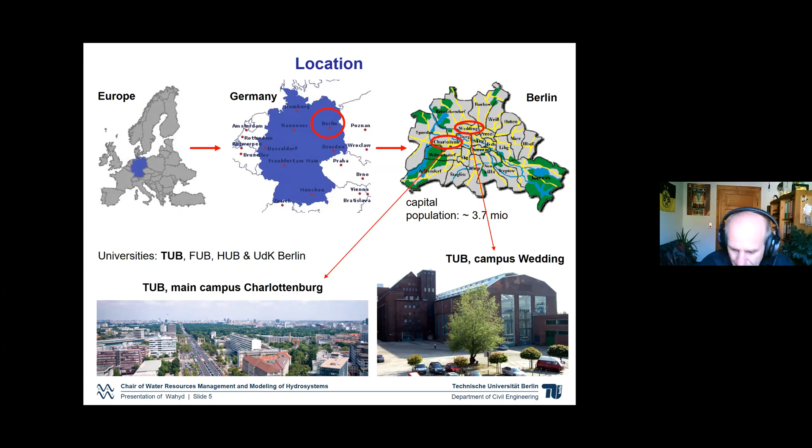Some facts on TU Berlin: we have 35,000 students on average, and 350 professors, so the ratio is 1 to 100. If you look in the US and in the UK, probably the number is much better there. Nevertheless, it also works in Germany.

So we have 7 faculties organizationally. My chair belongs to faculty 6, Planning, Building, Environment. Within the faculties we have institutes; in our faculty we have 8, including architecture, geosciences, landscape engineering, and others, and also civil engineering. Within the institutes we have the chairs, so in that sense the chairs are the smallest units. My chair is one of the 13 chairs of this institute. There is another chair in the water field, Professor Barjenbruch's, who does urban water management, and we closely collaborate.

I may also add, this is not on the slides: Berlin has been successful within the excellence strategy of the federal government, and since 1.5 years there is a joint activity of Berlin, the Berlin University Alliance, where 4 universities are collaborating in various fields. We are also glad that we can participate in one of the bigger research activities starting at the beginning of next year, called CLIVA, Climate Impacts on Berlin and the local and regional surroundings of Berlin.

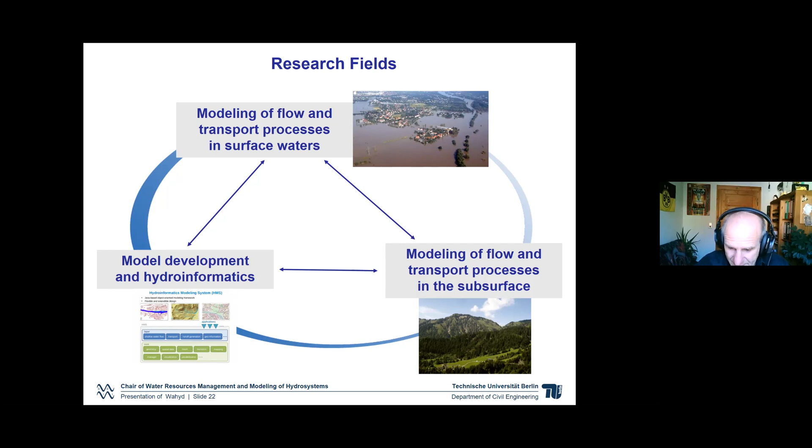Among the research activities, this research training group has already been mentioned. Allow me a few comments on making a PhD in Germany, because it differs a bit from how it runs in the US and many other countries.

In Germany, making a PhD within a structured program is not that common. I would say much less than 50% of students do a PhD in such a program. They make a PhD within a project, or they are funded by the university through basic funding, as was the case for Ilhan, or they have a scholarship, as is the case for Jia Heng, who is connected from Loughborough.

We do have PhD programs, but they provide a framework, possibly some financial support, but don't have a clear content focus. When they exist, they have a broader focus, say a PhD program in the water field, for example. Specifically looking at Berlin, there have been a few, but they have not been that successful, to tell the truth.

Making a PhD in Germany generally takes a relatively long time. 4 to 5 years is quite common, and I think it's faster in many other countries in the world. On the other hand, these kinds of research training groups do exist in Germany.

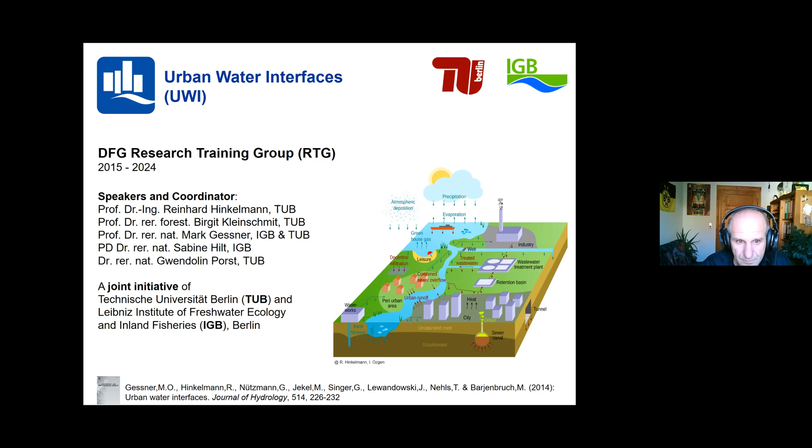Okay, let's say some information on urban water interfaces. Why are they important? Because they play a key role in the urban water cycle. They connect a large number of compartments and subsystems, and have a considerable impact on overall system behavior.

We have a very broad view on interfaces. There are interfaces in natural systems - I will comment on groundwater and surface water. There are interfaces in technical systems like a sewer system between wastewater and air, or interfaces between natural and technical systems like bank filtration, which is quite common in Berlin.

In addition, we have identified 4 areas where we do very intensive collaboration. We call these common topic fields. Regarding qualification, we want to link engineers and natural scientists. I forgot to mention that the research training group is a close collaboration of the Technische Universität Berlin together with the IGB.

IGB is the Leibniz Institute for Freshwater Ecology and Inland Fisheries. This is a leading institution for freshwater ecology, for lakes and so on in Germany, and it's also internationally renowned. We want to bring them to a new quality of interdisciplinary knowledge with a strong international component, within a structured framework.

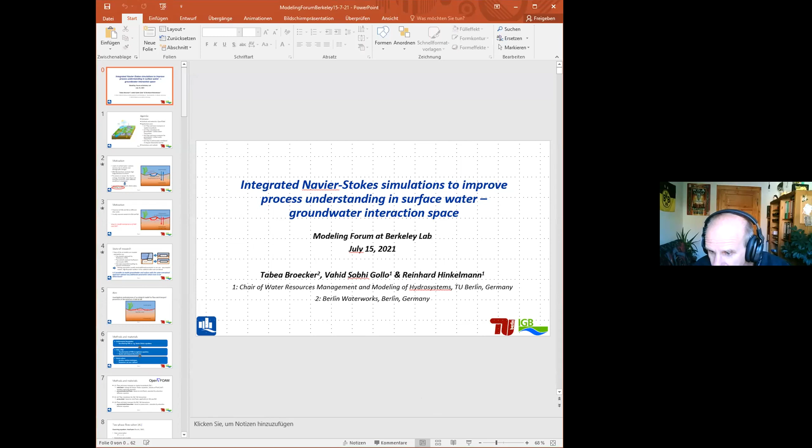So today I would like to talk with you about an integrated Navier-Stokes solver. With the help of the solver, we can improve the process understanding in the interaction space of surface water and groundwater. The major part of this presentation, all the work, comes from this research training group.

The major part of the presentation is part of the PhD of Tabea Broecker. She finished last year, and there are also contributions from Vahid Gollo. He is coming into the final stage of his PhD, and I have the pleasure to present the results of these PhD students.

And we have reused it many times. Ilhan, the effort was, of course, quite good to be done. It's really a nice figure.

Within the presentation, I will give you a short motivation. Then I will introduce the methods we used and extended within the open source simulator OpenFOAM. And then there will be four application cases.

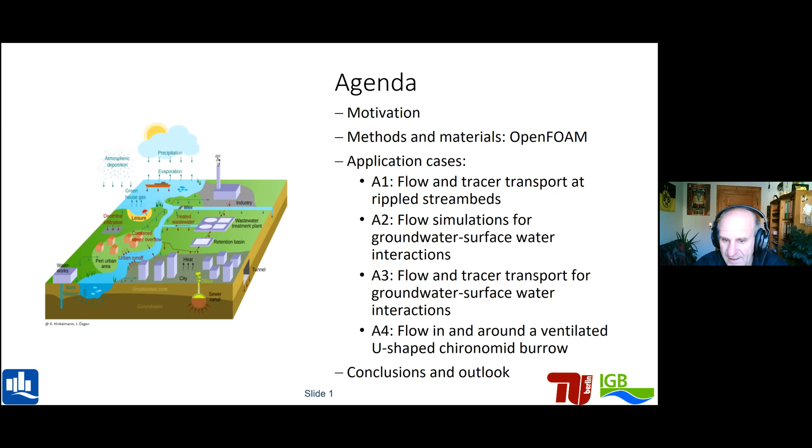Three are related to flow and transport processes at the interface of groundwater and surface water. There is a fourth case where we consider another interface, between free water and porous medium flow - this is a burrow which has been dug by something like an earthworm. At the end, some conclusions and an outlook on further work.

Okay, maybe first the hyporheic zone. Probably you are all aware that the loads on water systems are increasing, more specifically even on urban water systems they are increasing, and we have to expect climate change and other changes that will increase the stress on these systems.

The hyporheic zone connects the surface water with the groundwater, and a lot of biogeochemical reactions take place there. So on the one hand, we try to protect this zone. On the other hand, we may want to engineer this zone to make advantage of it, because it has some possibilities to remove or retain contaminants.

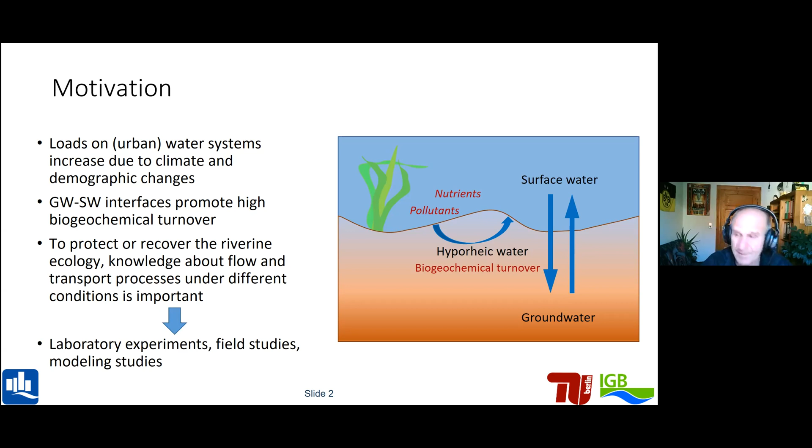If we want to go into the details, it's good to know how the processes occur there, how the flow and transport processes work in these areas. We improved our process knowledge over the last couple of years. We can do that with lab experiments - other colleagues in this research training group did lab and field experiments. Our focus was on modeling.

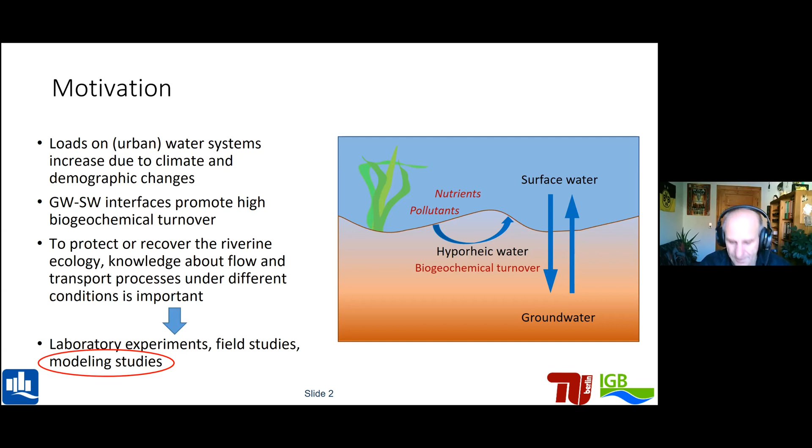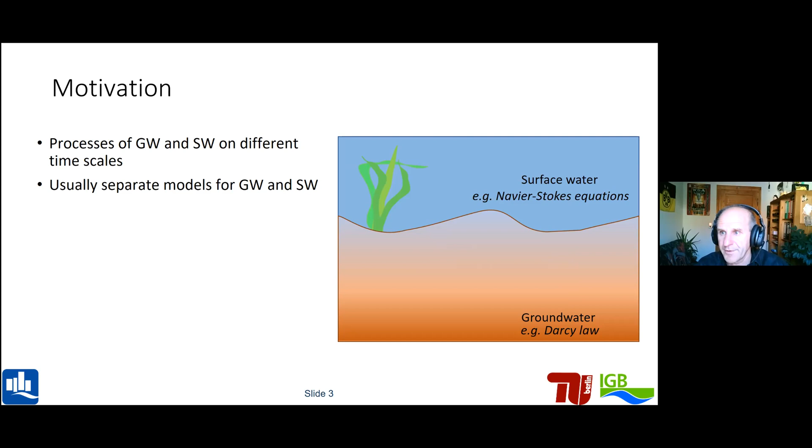Of course, the time scales are quite different between surface water and groundwater. In surface water, the flow velocity is a meter per second, while in groundwater it's a meter per day - quite different time scales. We have to bring them together. The common approach, probably also applied a lot in your group, is that we have a separate model for surface water flow and for groundwater flow, and you do some coupling.

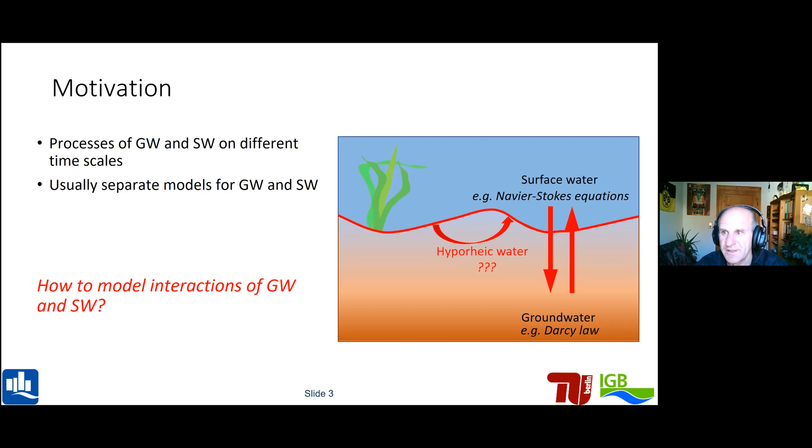For some questions, a simple coupling might be sufficient, no question. But there are also questions where the interaction between the two systems plays a very important role, and there more advanced methods need to be taken into account, which can also account for feedback effects, for example.

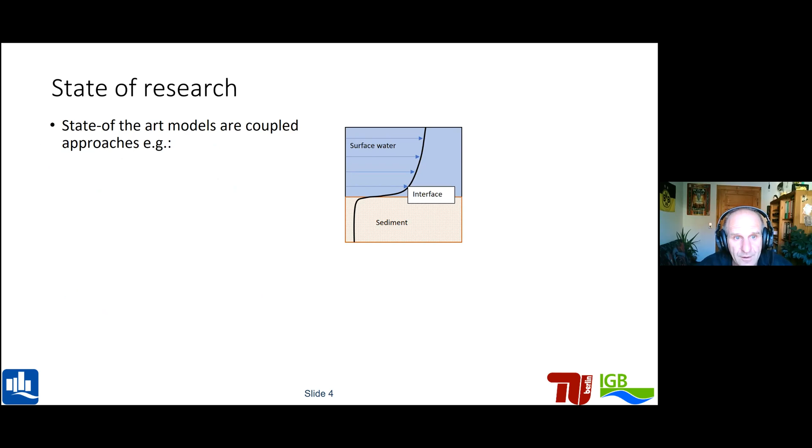If we consider the state of the art, different coupled approaches exist. There is a one-domain approach, already a couple of decades old, and there is a classical two-domain approach by Beavers and Joseph, where they introduce a specific parameter to account for the jump in shear stress at the interface. This coefficient is generally determined by calibration.

What is often done in many cases is a one-way coupling, again without taking into account the pressure properly and without taking into account feedback effects.

Also, when the river sediment or porous medium is a bit coarser, the Reynolds numbers of the flow within the transitional zone may become much higher than Reynolds number 1, and then we are out of the range of the Darcy law.

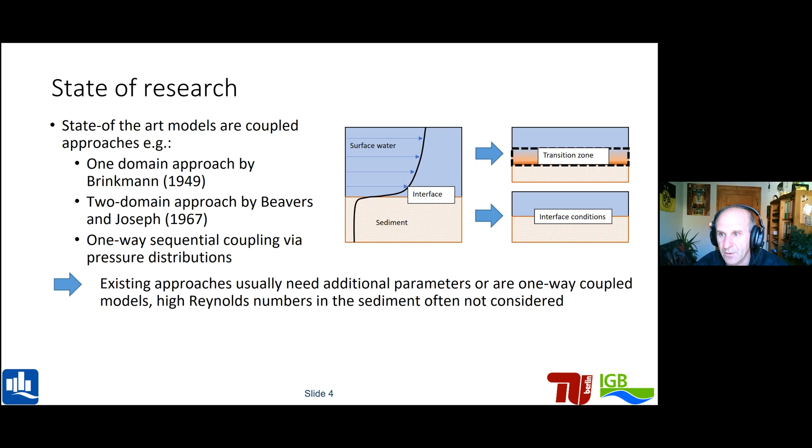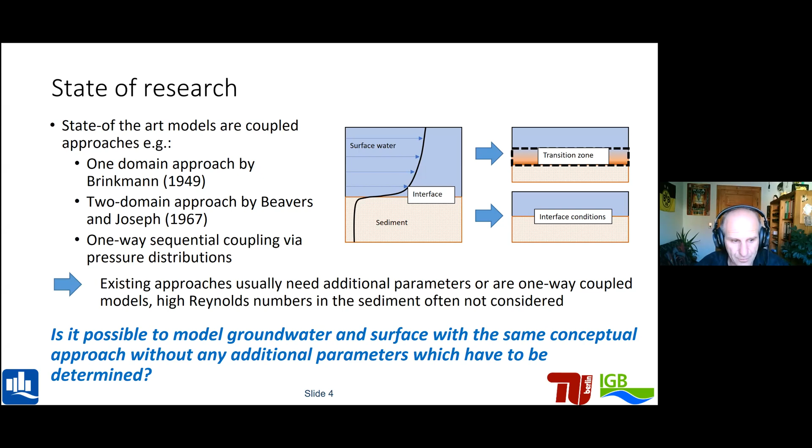So the question is: are there other ways to take into account the processes occurring around this interface, including the feedback effects? Are there other approaches to do that? Fortunately, yes. Other researchers already did some work on this, and we could use and extend that work.

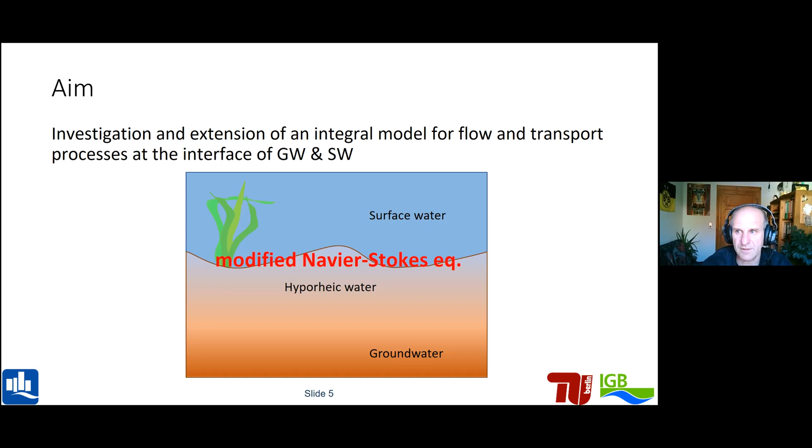If we formulate a modified version of the Navier-Stokes equations, we can apply the same model concept for the porous medium and for the free flow. We introduce a porosity, which is 1 in the free water and about 20-30% in the porous medium. Also, a specific resistance term will be introduced, which I'll show you soon.

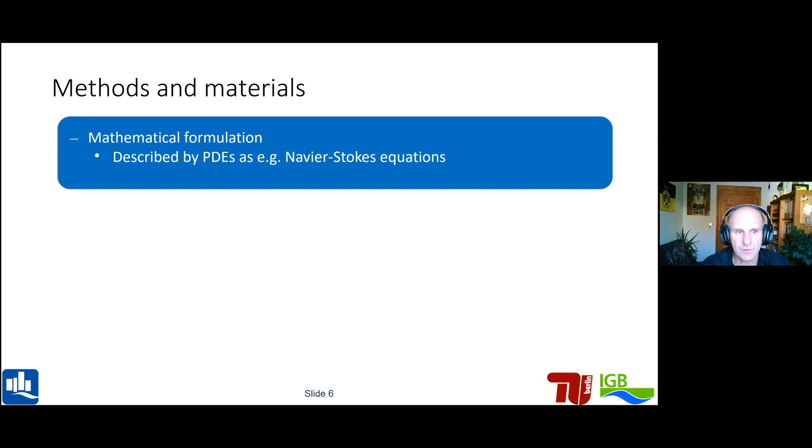Most of you are probably aware that we formulate balance equations: mass balance and momentum balance equations, in this case the Navier-Stokes equations. This gives us a system of coupled, nonlinear partial differential equations (PDEs).

We do some discretization. OpenFOAM uses the finite volume method in space and finite difference techniques in time. We then end up with algebraic systems of equations, which require iterative solvers. We use these solvers both to solve the systems of equations and, importantly for Navier-Stokes, to couple the pressure equation with the momentum equations.

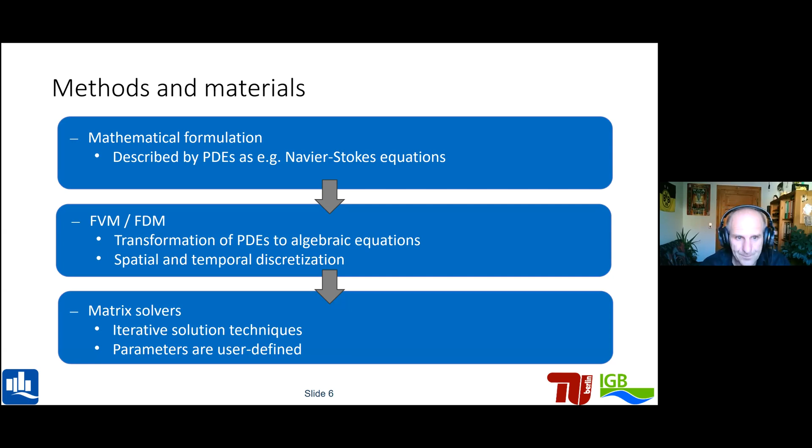As mentioned earlier, we used and extended open solvers provided by OpenFOAM. We started first by modeling only the flow in the river, excluding the sediment, treating the sediment as a rigid boundary. For this, a solver called Interfoam was available.

Interfoam uses a volume of fluid method. We used it also for two phases - I'll come back to the two phases soon - and to capture the interface between the surface water and the air, an interface capturing approach is used.

In the second and fourth applications we applied that solver, and in the third case we extended it further by adding a transport equation.

Now some ideas on the balance equations for the two-phase flow solver. Why do we need two phases? We need two phases when simulating flow, for example, over ripples and dunes in a riverbed, where the water level is only a few decimeters high. To track the free surface, one good possibility is to use two phases, including the air phase, in order to get a good representation of the free surface.

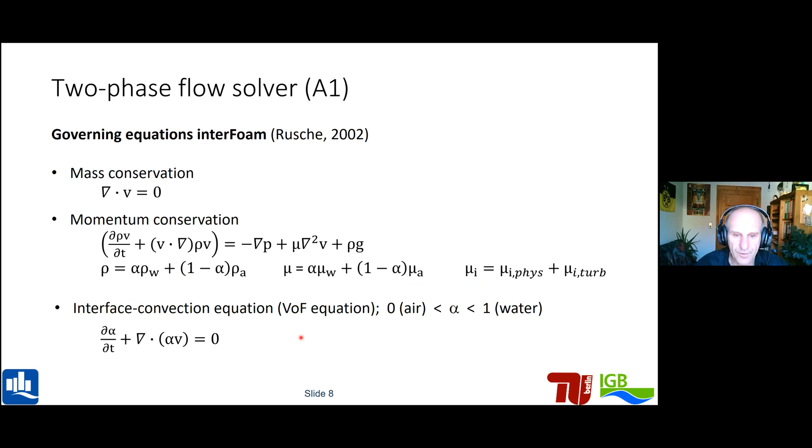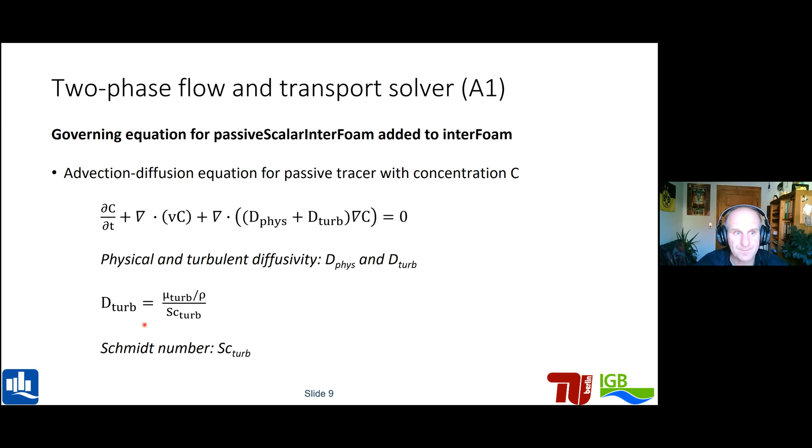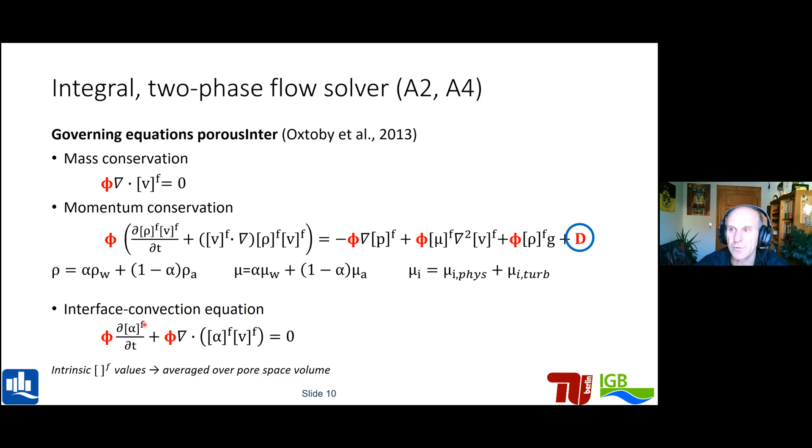The other things remain more or less similar. And there is a further term added to the momentum equation. This is, let's say, a resistance term, which accounts for different effects we will see soon.

So here is the resistance term in detail, and maybe to comment on how the porous medium is taken into account in this extended version of the Navier-Stokes equation. It's taken into account by a porosity and by a characteristic diameter. So there is no permeability or hydraulic conductivity. This is not taken into account.

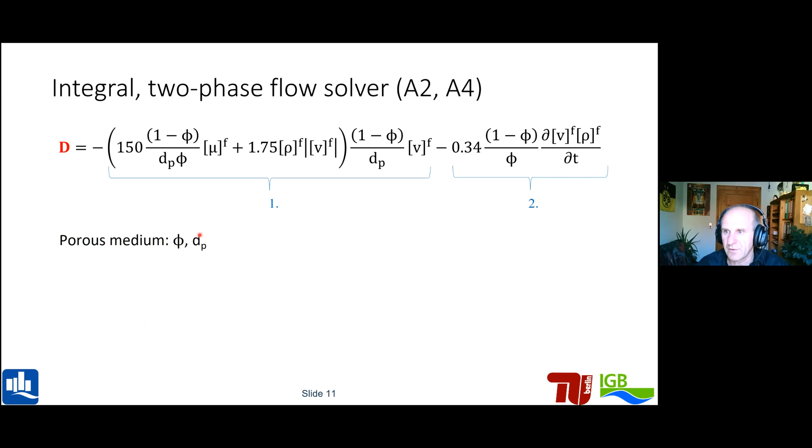These two parameters describe the porous medium. Of course, when we know these parameters, we also have an idea of how big the hydraulic conductivity or permeability can be. And these terms, the first term accounts for the friction of the fluid with the porous medium.

Let's say an approach from Ergun has been implemented. And the second term accounts for an increase in the effective mass, and it also accounts for recirculation zones, and another experimental approach or results from Van Gent are implemented there.

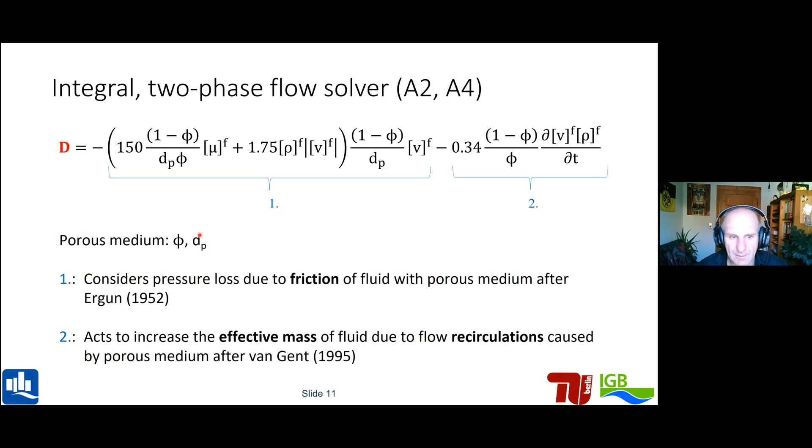So this resistance term behaves quite good for coarse material when the dP is in the range of centimeter or millimeter. If it goes much below a millimeter, then the CPU time is tremendously increasing, and then it's no more recommended.

Okay, we also added a transport equation on that. Nothing specific compared to the previous part.

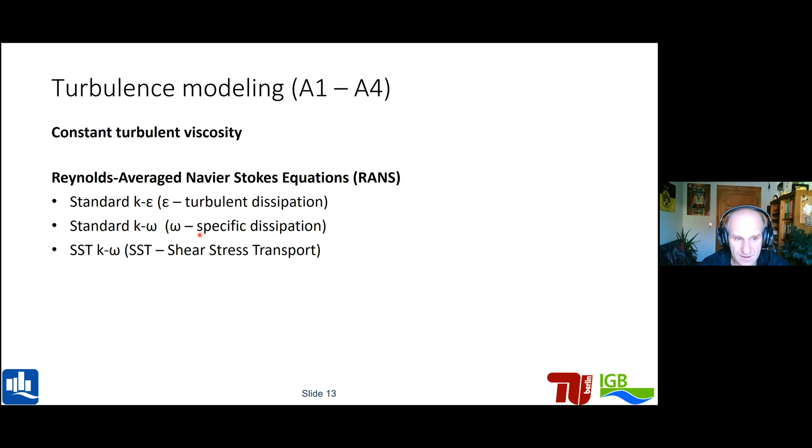With regard to the turbulence, fortunately in OpenFOAM many models are available, like the standard K epsilon, the K omega, and the combination of both is K omega SST. Sometimes we made good experience with that.

And for some cases, we even used the LES method, and the LES method, of course, resolves much more of the eddy structures. Let's say the coarse eddies are directly resolved by the grids, and we only need a model for the very fine eddies, which are below the grid size.

On the other hand, for the systems we investigated, the CPU time increases by at least a factor of 10 when we switch from K omega SST to large eddies. So therefore, we carefully have to check whether this is really needed.

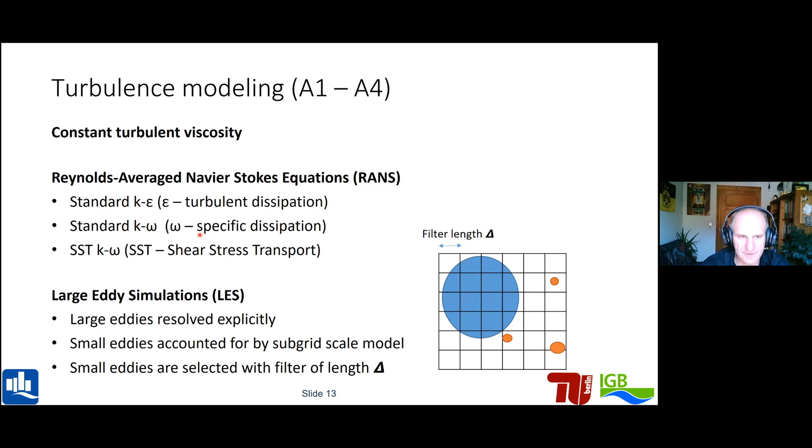We have to generate a mesh. There are some possibilities within OpenFOAM, but we can also add external mesh generators, and then we have to set the boundary conditions. I may mention, the system we will see soon has an inlet and an outlet, and then an upper wall and a lower wall.

Different kinds of boundary conditions are set for the velocity, the pressure, the concentration. In principle, they are of Dirichlet or Neumann type.

I would like to add, if we compare these CFD simulations with shallow water simulations, it's a bit more tricky to come to stable results. For the CFD model, you need to have a good combination of robust boundary conditions, a fine mesh, and the suitable turbulence model. It takes some more time compared to shallow water flow modeling.

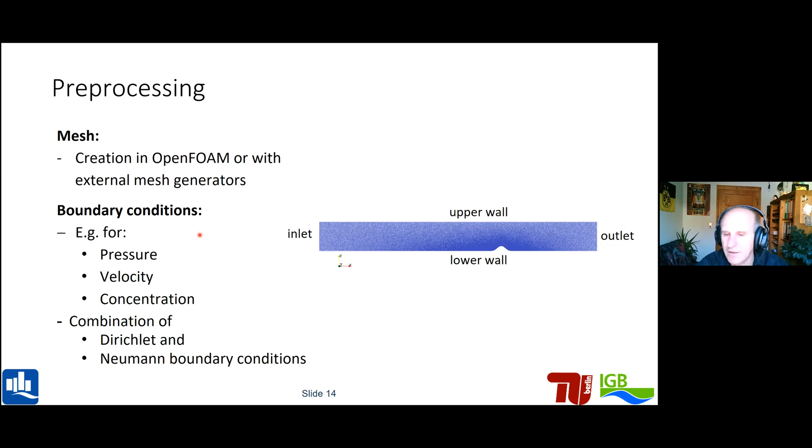Okay, that brings me to the first application, flow and tracer transport at a rippled streambed. Before we went to natural-like systems, we wanted to test our solver.

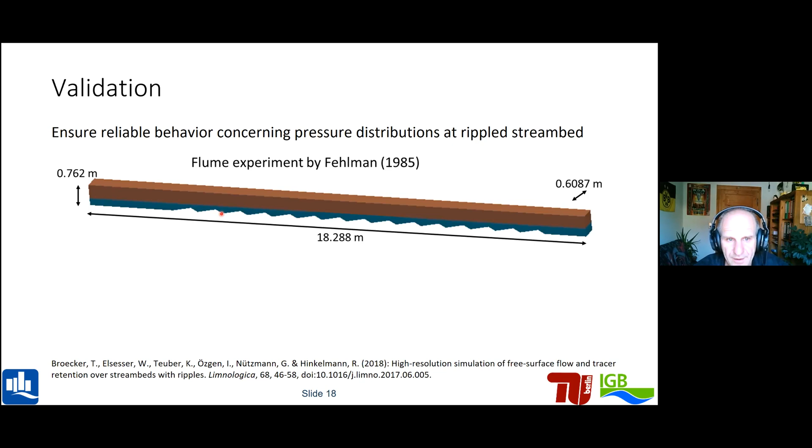We did that with several cases. I'm showing you here one case. There were experiments carried out by a person, Fehlman, who investigated a system where ripples or dunes have been idealized by triangles, and their data were available so we could compare our numerical results with these experimental results.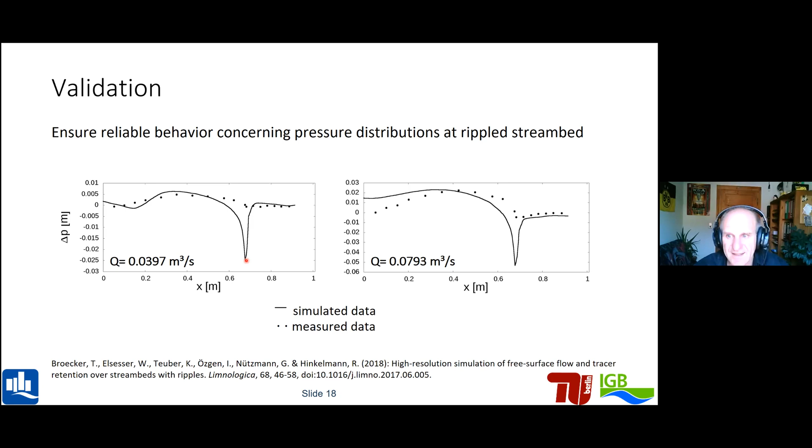Okay, and then to add the transport equation, we did standard cases. There are 1- and 2-dimensional analytical solutions for constant and pulse injections, and we checked our model with that. The agreements were quite good, so we thought we could now apply the solver to other cases.

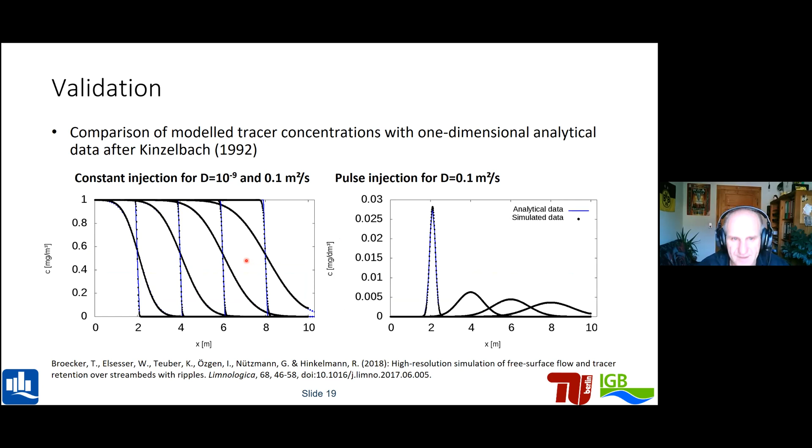So the case that Tabea investigated very systematically is shown here. We have a system 1 meter high, with 50% water and 50% air, and an inflow area so that the flow is developing and is fully developed by the time it reaches the ripples, then some outflow area to have good conditions on the outflow boundary.

Then she made many investigations varying the ripple height, in the range of 1, 5, 10 centimeters, the ripple length 20, 40 centimeters in that range, some distances between the ripples, and we did that for different discharges and different turbulent Schmidt numbers.

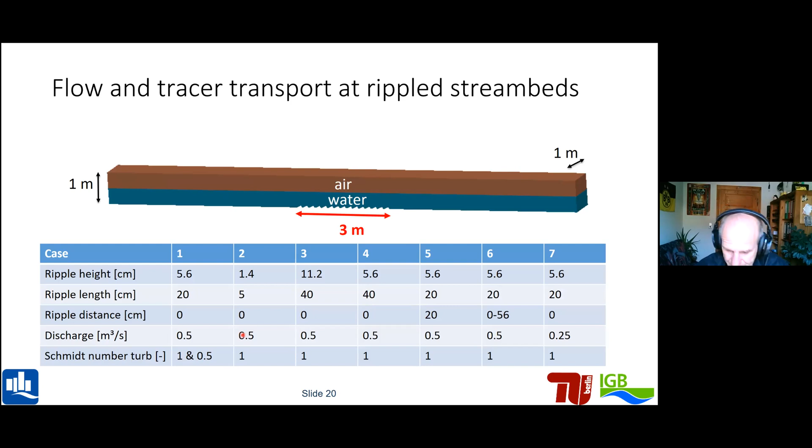To show you some results of the reference case, first here a view on the mesh. The height was here 5.6 centimeters, and you see that the mesh is quite fine. The edge sizes were in the range of a few millimeters.

So we have a quite fine mesh in the water, up to the free water surface, and then of course more coarse in the air. We see flow from left to right, high flow velocity above the ripples, and smaller flow between the ripples. Why the flow is smaller between the ripples we can see here, with flow over the ripples and eddies occurring.

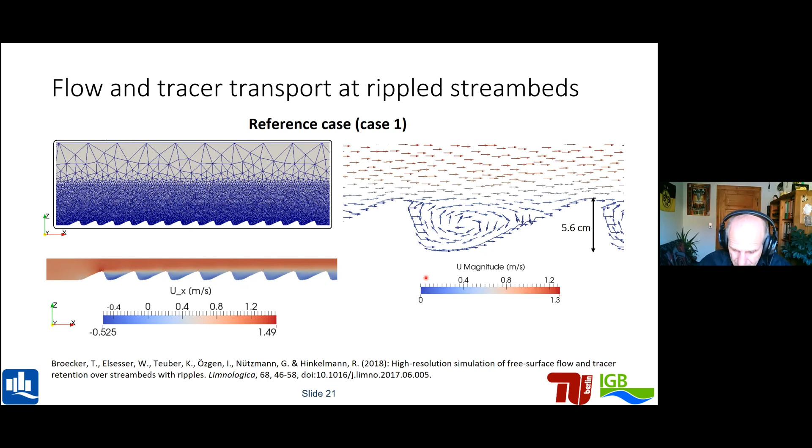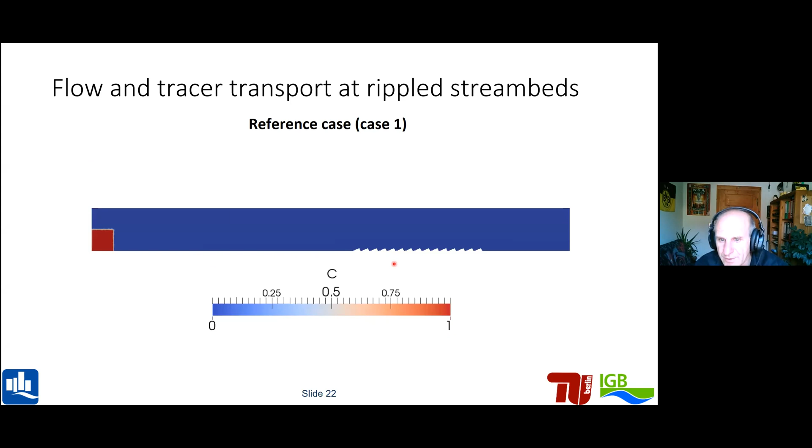Here is a case where a tracer has been injected, transported from left to right over the ripples. Then the scale switches from 1 to 0.05, and we see that some tracer is retained. We saw the eddies, so some tracer is retained between the ripples, and it takes a bit longer until this tracer is also removed.

From the many cases, I have two where I want to show some other results. For example, if we double the ripple length, the system looks completely different. While we had the eddy before, now with doubling the ripple length, no eddy occurs. We have a very smooth flow here, and the tracer is removed much, much faster.

We also see a bit higher pressure on the upstream side where the water comes, and a bit lower pressure around the crest. This lower pressure, which we also saw in the Fehlmann experiment with this drop in pressure, we see it qualitatively here as well.

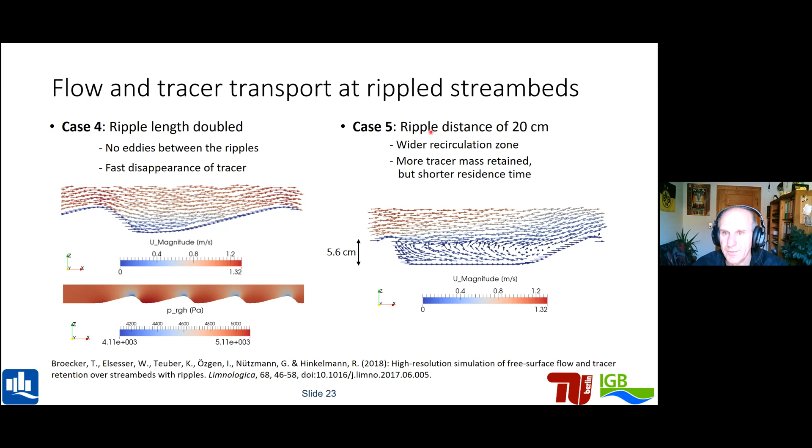In another case, we introduced a distance of 20 centimeters between the ripples, and we again see an eddy structure, but now much larger. We see a wider recirculation zone with much more tracer retained, but the overall residence time has been shorter.

The reviewers asked us to do some more investigations, and we did. They wanted to know, for example, how the pressure differences at the middle ripple for the different cases.

So the pressure difference, I've shown you an area where we have a high pressure area and a low pressure area. And from that, we can determine a pressure difference along the ripple. This pressure difference is quite different in the different cases. For example, in case 3, it's relatively high.

We also considered the breakthrough curves, and for example, this high pressure difference was also related to a high peak in the breakthrough curve.

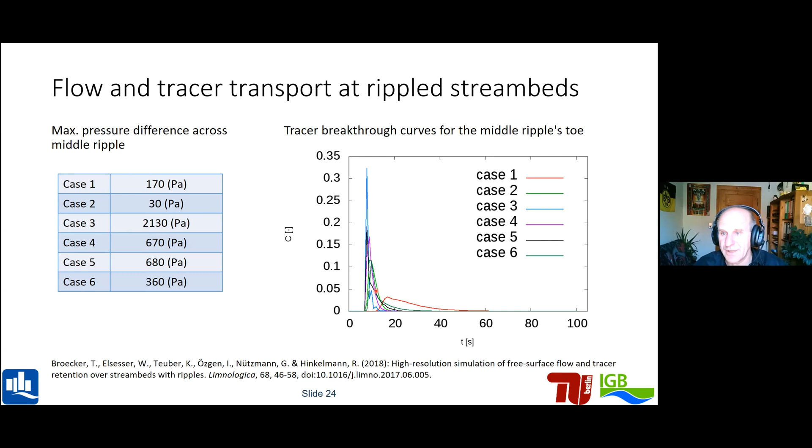We could draw some conclusions from that. The solver was capable to simulate the complex flow fields between the ripples and the tracer transport between the ripples. And we found out that the discharges, the ripple size and the spacing significantly impact the flow and the retention behavior between the ripples.

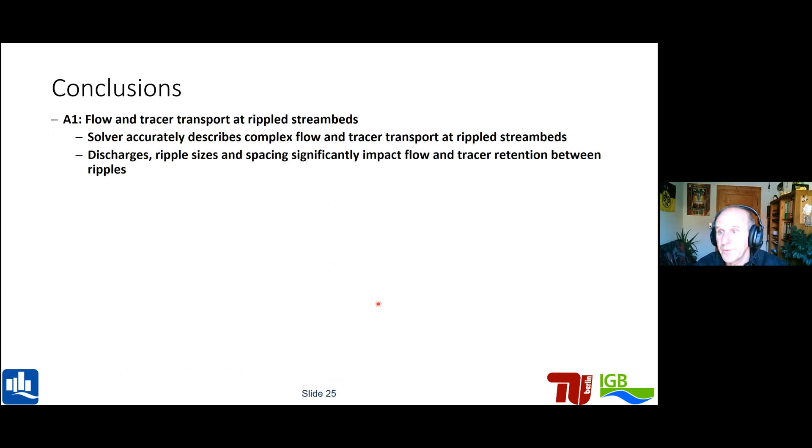So in the next application case, I would like to give you some idea of the solvers for this case. They are similar in the other cases. We have to choose solvers for the interface convection equation, for the pressure equation, and for the momentum equations. Maybe to comment on the pressure equation, this is a Laplace type equation, so we have symmetric systems of equations.

We can use a PCG, preconditioned conjugate gradient method. We can use some algebraic multigrid preconditioning, and for the smoother in this multigrid cycle, we can use a Gauss-Seidel method.

For the momentum equation, the matrices are non-symmetric, so we need a solver for non-symmetric matrices. One of them is BiCG, bi-conjugate gradient method, and the preconditioning is carried out with some incomplete lower upper LU decomposition.

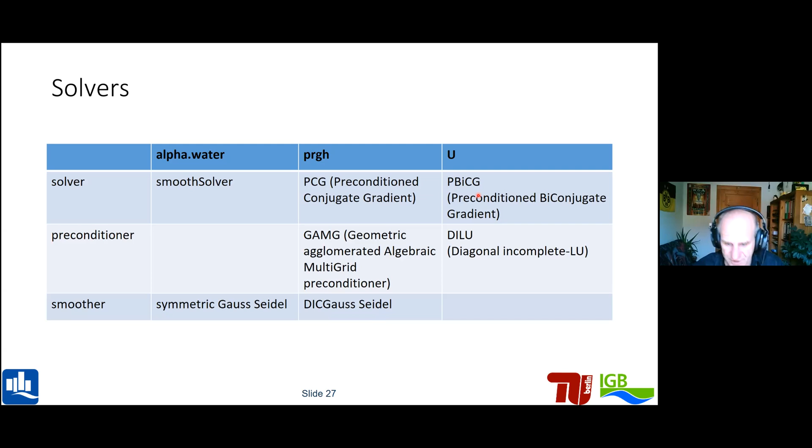Again, before we went to the ripple system, we checked the literature for some test cases. On the left we have the flow through, let's say, a rectangular domain or a rectangular dam. Imagine we have water standing here on the left, and then we have a porous medium, and then we have a seepage through the dam or through the domain.

The integral solver computed the green points, and the green points coincided quite well with other numerical and experimental results.

And we had another case where the seepage line through a more natural or more dam-like structure is investigated. There is an analytical solution available after Casagrande, and again, the solver could reproduce this analytical solution quite well.

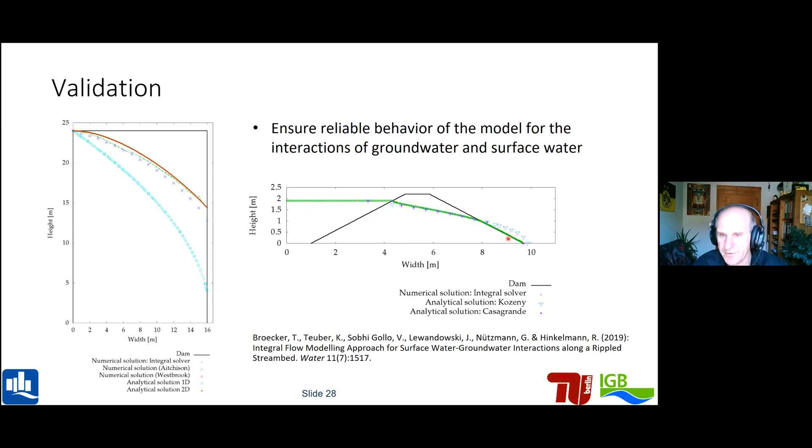So then we went back to the system of the first case, and we added the sediment. We had two cases, one where the sediment consists of sand with a diameter of 2 millimeters, the other case was with gravel, 15 millimeters, and the porosity was 25% in both cases. Then the same cases as before have been investigated.

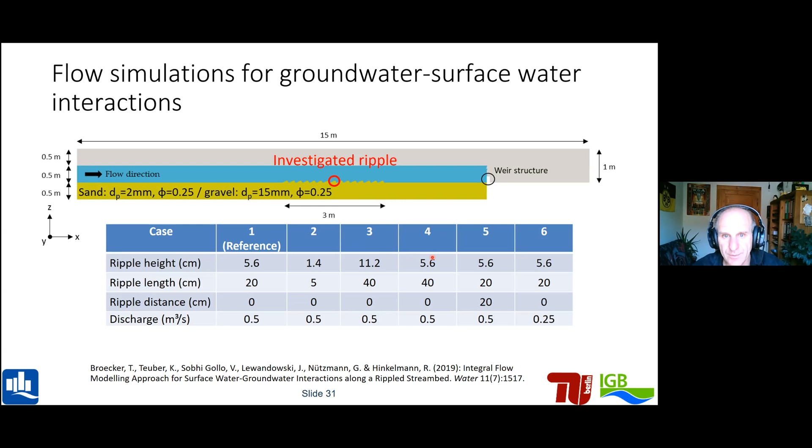So we consider in the following the middle ripple. What was important, we were interested in what is the exchange between groundwater and surface water. For that, we considered this ripple much in detail.

On the upstream side, there can occur areas with inflow and outflow. On the downstream side, there can be areas with inflow and outflow. So Tabea computed all these fluxes to, at the end, have some ideas whether we have inflow or outflow, and to consider that in detail.

And of course, these fluxes are quite important for other processes like biogeochemical things that do occur there in the hyporheic zone.

So, some results, let's start here to consider some results on the left. We see here the ripple, and what we see here is, again, a very complex structure. This is again the reference case. Maybe you have in mind from the previous simulation, we had one ripple area, one eddy, and now we have something like two eddies.

We have one eddy here, another eddy here. And we see inflow from here associated with a bit higher pressure, and then we have, let's say, outflow here.

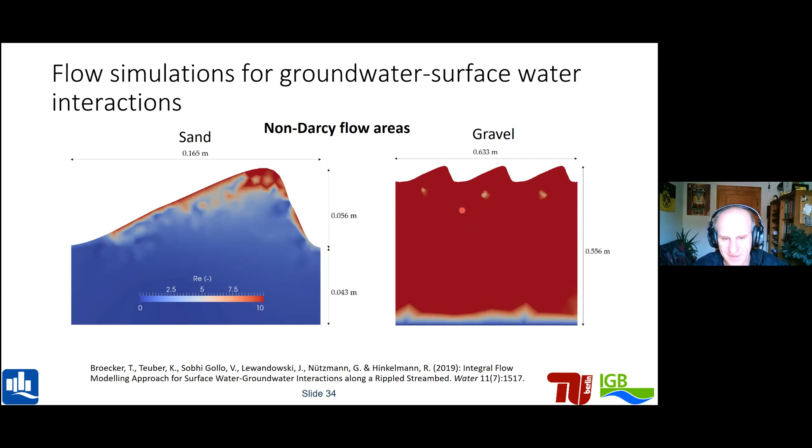So we could draw some conclusions from that. From the interfacial fluxes, we found that small-scale structures and the kind of soil significantly influenced the magnitude. Sorry for going back, I forgot to give you the numbers: the exchange flux here is about 2.7 times 10 to the -3 cubic meters per second per square meter, while for the gravel this is about an order of magnitude higher.

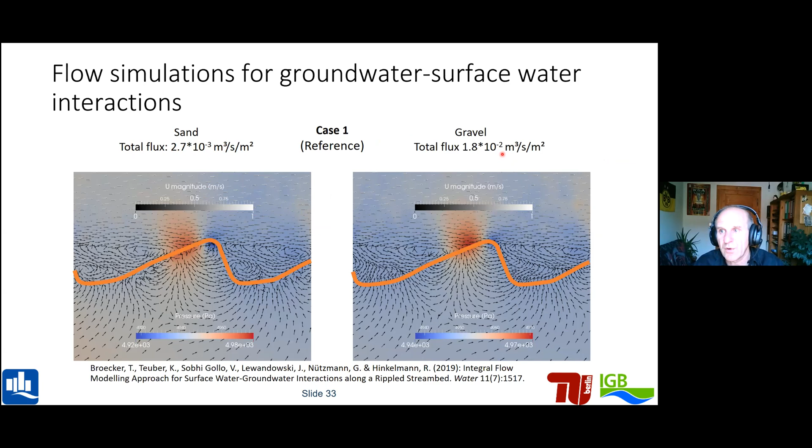With the one-way coupling, all these feedback effects cannot be taken into account, and the sediment properties also influence the surface water flow. The non-Darcy flow areas occur below the interface, and how deep they go into the sediment depends on the permeability of the soil.

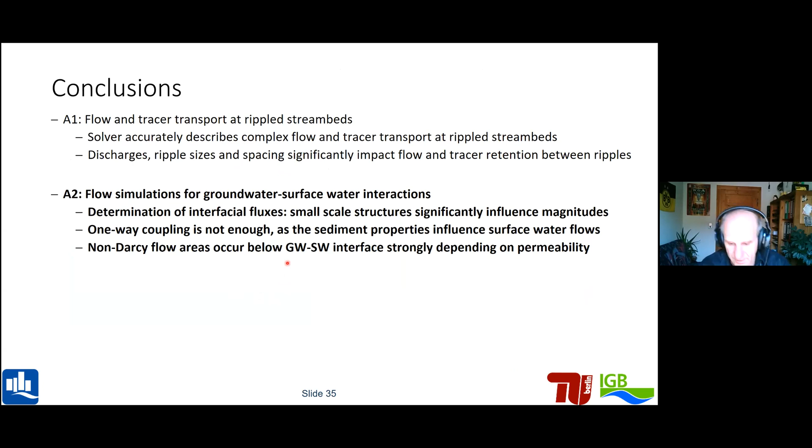That brought us to the next case, to include also the transport in the porous interior. We were glad to collaborate with researchers from Israel who carried out experiments and are also co-authors of a publication. They carried out experiments in a flume with ripples and introduced some tracers, which we will see soon. We got all the data from them regarding the geometry, and later also the concentrations.

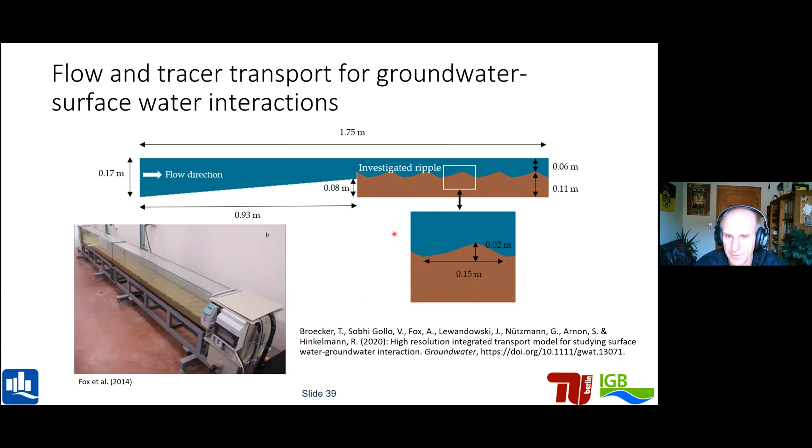So what we investigated first was the flow. We distinguished three different conditions based on whether from the bottom we have an inflow in the vertical direction—this is called the gaining condition; whether there is no in or outflow—this is called the neutral condition; and whether we have outflow—this is called the losing condition. We investigated all three conditions.

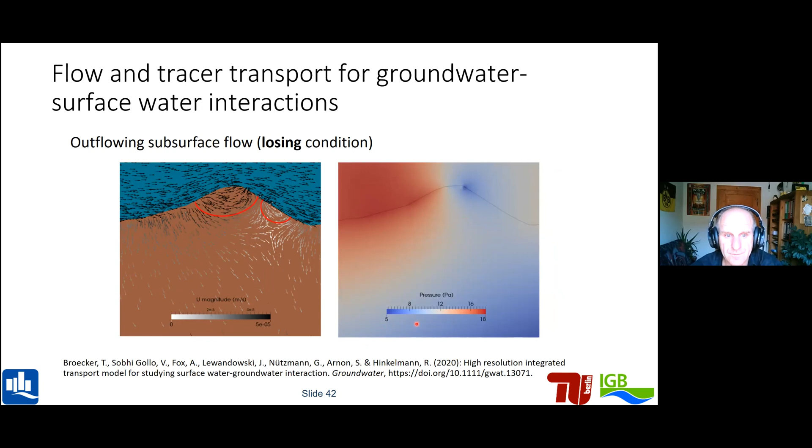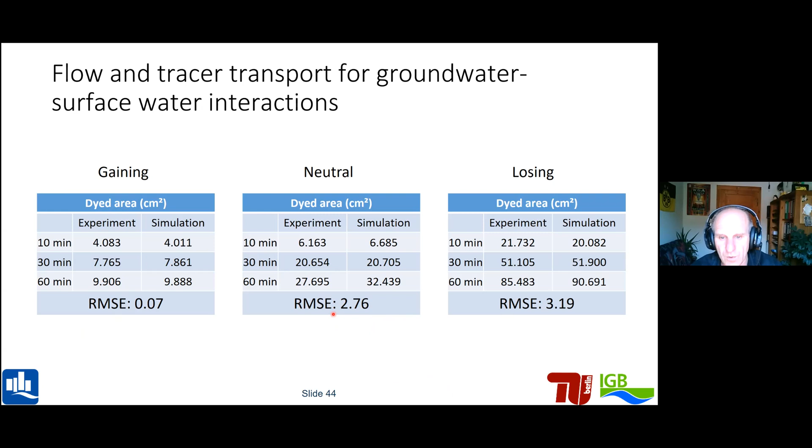Again, the reviewers wanted to have that not only visually, but they wanted some numbers. So Vahid used some image processing tools to check which of the area is blue and which one is yellow. From that, we could determine a root mean squared error between the experiment and the simulation. Fortunately, this root mean squared error, computed over the whole 1 hour, was relatively small.

We could again draw some conclusions. So for the neutral, gaining and losing conditions, we overall could achieve good agreement between observations and numerical simulations.

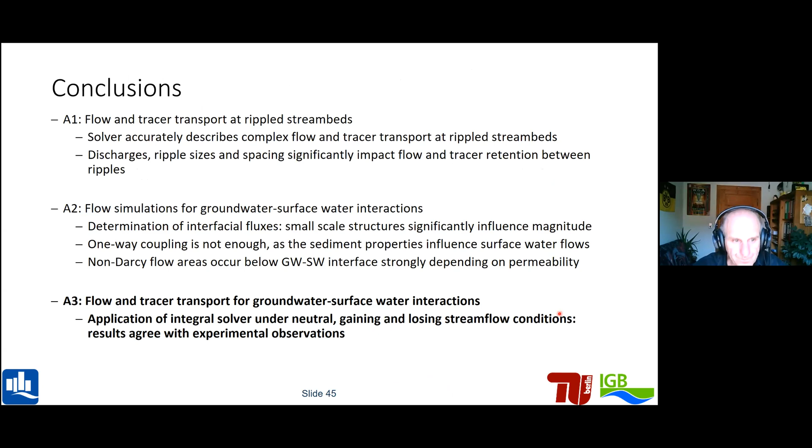The last case, work carried out by Vahid Sobhi Gollo, where we investigated a slightly different system, briefly mentioned in the beginning, a system built by chironomid, which is something like an earthworm. When this becomes a bit older, it can fly.

We will see soon that by this pumping activity, flow fields are induced, and these flow fields have a significant impact on the biogeochemical processes that occur there. That has been found out by experiments and also other simulations.

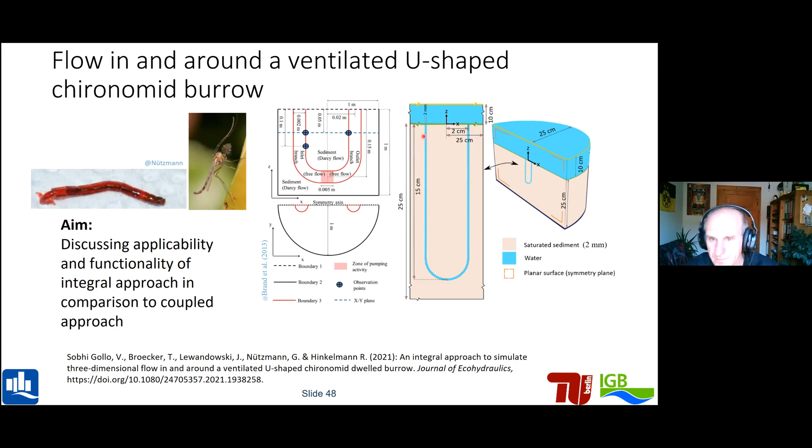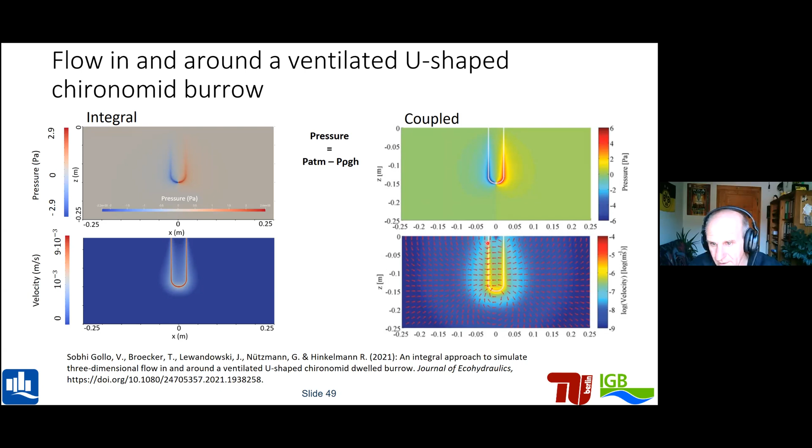This induces some flow fields as well. What we see here, for example, is that through the suction, the flow goes to the pipe or to the burrow, and on the other side, through the pumping, the flow goes away from the pipe. In between, the flow is pumped out, leading to flow from right to left, and in addition there is the under-pressure, so a strong flow from right to left is induced. Some flow activities are induced in the subsurface.

And again, they have an impact on the transport and reactions of material that is occurring there.

Nobody knows the exact truth, whether they compute a pressure difference of 6 or of 3. Nobody really knows the truth, but we think our approach is a bit closer to reality. We could say this other approach is like a rigid system: a fixed wall, a pressure distribution given from the pipe to the porous medium, with no feedback effect. Here, I would say we have more of an elastic system, where there is interaction, and some of the pressure also goes into the sediment, leading to other flow conditions within the pipe. So we assume this might be closer to reality.

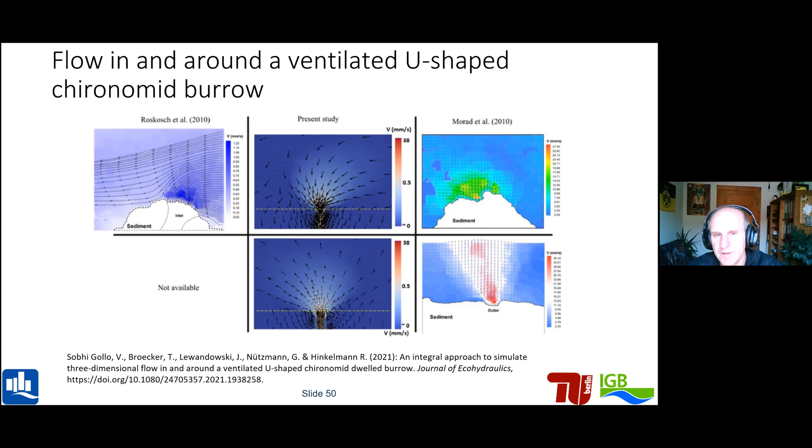Here are also some qualitative comparisons to experiments. In our study, we see the sediment-water interface and the burrow where it ends, and here the water is sucked in, with inflow here. In experiments, a qualitatively similar behavior was observed. On the outflow side, our simulations look like this, while experiments found a similar flow field, so we can say there is qualitative agreement.

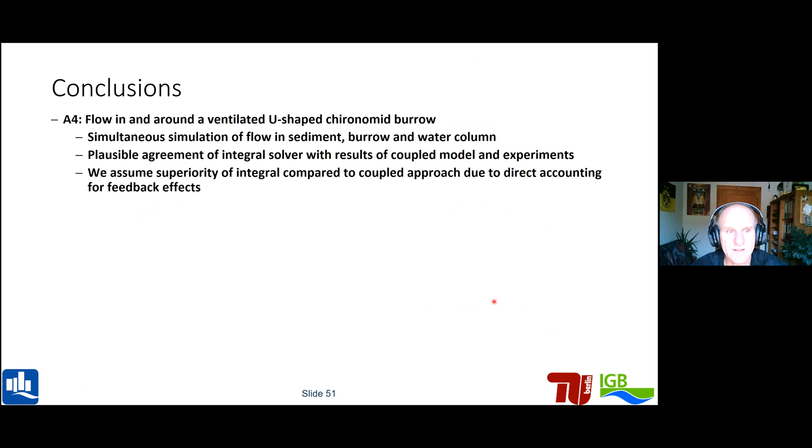That drove us to the conclusion that with the solver, we can do a simultaneous simulation of flow in the sediment, the burrow, and the water column. We got plausible agreement of our solver with results of a coupled model and experiments, and we assume that our model is a bit more close to reality.

That drives me to some general conclusions. Two PhD students applied and extended an integral solver, focusing on the interaction between porous media and free flow. We could obtain a couple of reliable results while comparing this integral solver with experiments, analytical and other numerical solutions. One advantage is that there are no empirical parameters that have to be adjusted. Our model conceptually takes into account feedback effects between the porous media and the free flow and vice versa, and it's also applicable in non-Darcy flow areas.

What I did not mention much during the simulations is that this solver is very, very expensive. The systems we investigated are quite small, a couple of meters, maybe 10 or 20 meters, and a meter high. We did 2D and 3D simulations, with meshes around 10,000 to 100,000 cells, up to 1 million cells in one simulation. It's not small, but also not that high. Several of the simulations on 100 cores take many days, so this is very, very expensive.

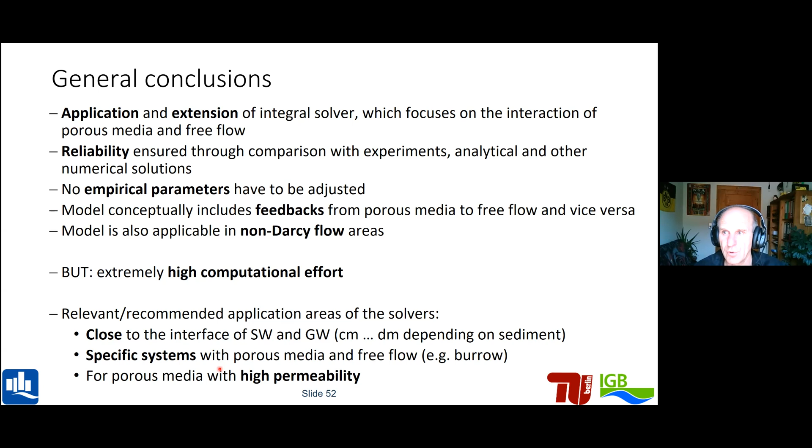So what work is currently underway? Vahid is doing a systematic comparison between the integral solver and the coupled model. For the coupled model, he's investigating on one hand the Navier-Stokes solver, but also a shallow water flow solver, so there will also be considerable differences whether we use shallow water flow or Navier-Stokes.

The colleagues in Israel also did some experiments with heterogeneous sediments. He already did some simulations. So what could be done is to set up some upscaling methods.

Those more familiar with river hydraulics may know that when you assign a friction coefficient to a rippled riverbed, you can look into a table, and depending on the geometry of the ripples, you can give a friction coefficient. So I had in mind to formulate an exchange coefficient for water between surface water and groundwater, depending on the ripple geometry, possibly also on the discharge.

This in principle only means that we apply the solver we have in many, many cases and determine some relations. And what we are also planning, because the new PhD student, Finn...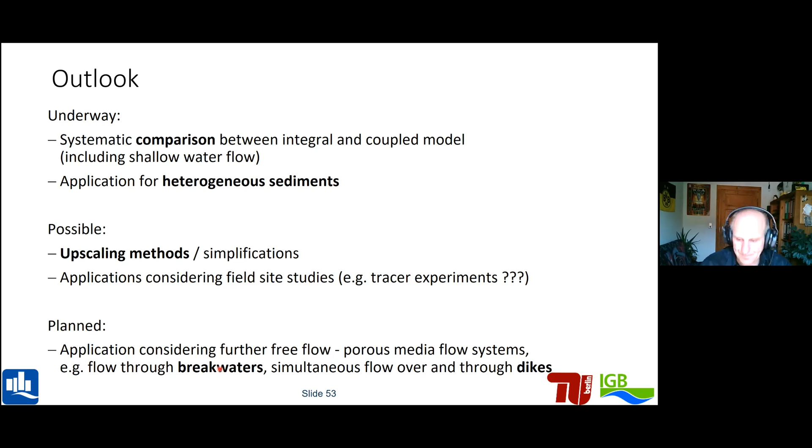If we have a dike, on one hand we have the seepage through it. When we have overtopping of the dike, then in addition to the seepage, we have the flow over the dike. On the outflow side, at some time we have also some outflow. When we want to do that by coupling several models—a shallow water model or a wave model and an unsaturated model—that would be quite tricky. But with our model, we can do that with the same model concept. So this is most probably what we will investigate when the next PhD student starts.

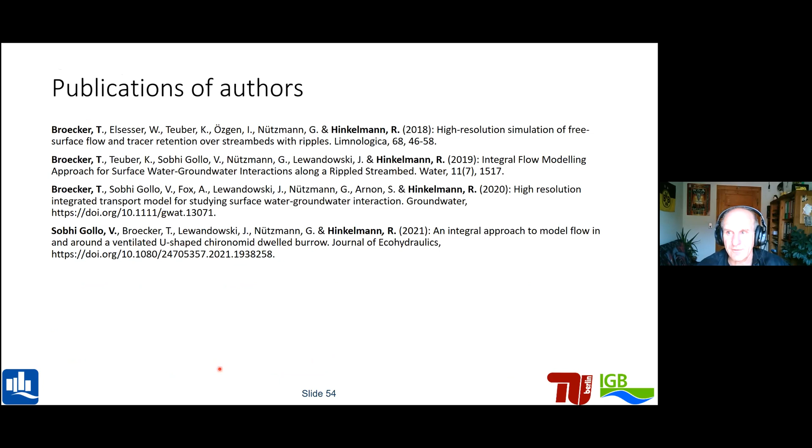Okay, most of the cases—I showed you 4 cases for 4 applications, and all these 4 applications have been published, with further references here. That's all I want to mention. Thank you for your attention, and I'm happy to answer any questions.

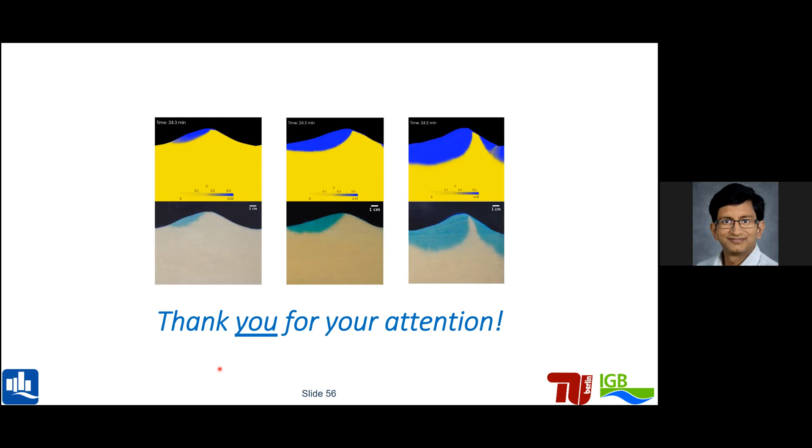In one figure I saw you mentioned there is turbulence eddies near the dunes, so I was wondering, because you need to use the turbulence model in your code, how does the turbulence model affect the eddy, and how does that further affect the pressure distribution?

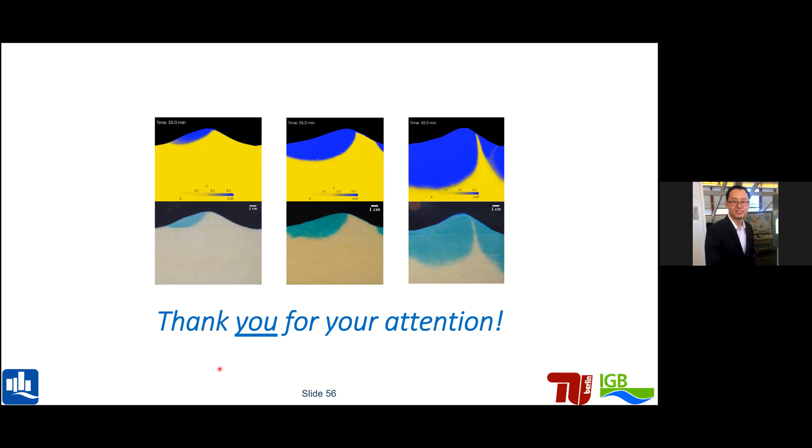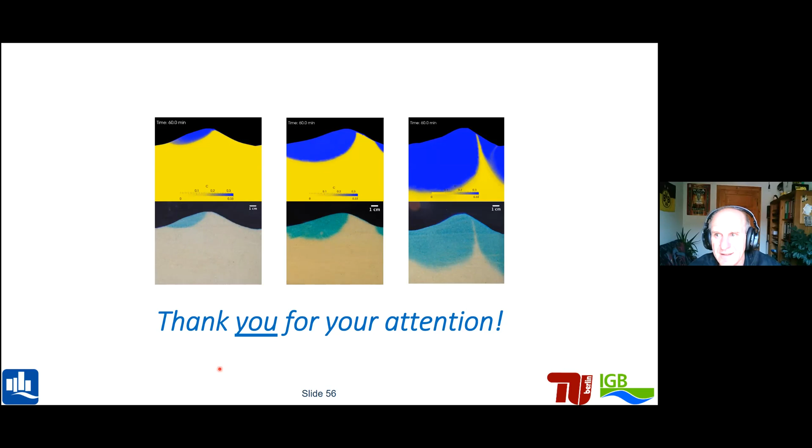I did not fully get your question, but I may mention that for the turbulence, in some cases, in the first application case for example, the simulations were done with large eddy simulation. In the other cases, we used K omega SST or K epsilon model. Does that answer your question?

I think it partially answered my question, but one question is, if we use different turbulence models, because the turbulence model affects the distribution of the turbulence eddies, and that of course further affects the pressure distribution—I'm not sure if you use different turbulence models, how does the model affect the pressure distribution?

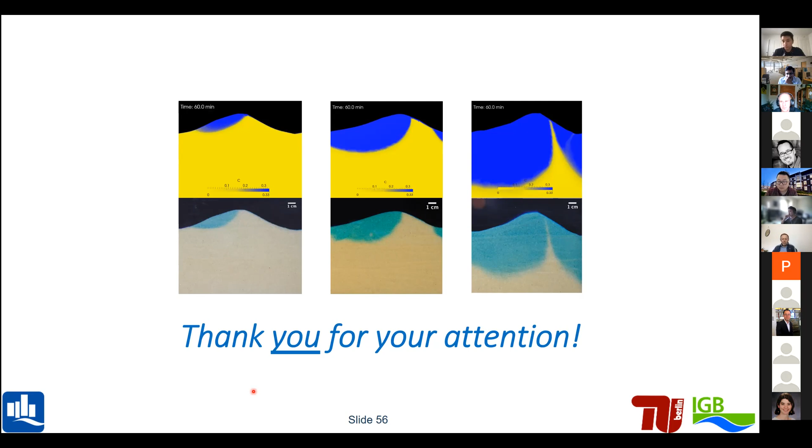Yeah, of course it affects both. Let's say LES is the more complex model. In some cases we found out that when we take a bit simpler model like K epsilon or K omega SST, the differences were very, very small, and then we decided not to take LES but to take K epsilon or K omega. In the first case, we saw there were bigger differences, so therefore we did the simulations with LES. But again, the factor in the CPU time is a factor of 10.

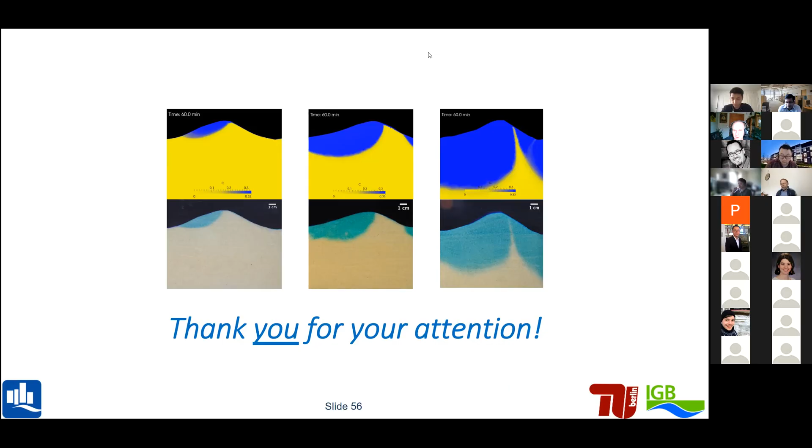So you took into account the resistance term for the interface between the free flow and porous media. My question is whether you use several equations to describe the resistance—specifically, whether you used the Brinkman equation.

We have not used the Brinkman equation. I introduced that in the state of the art—this is a two-domain approach, and what we are following is a single-domain approach. So we use the same model concept for the porous medium and for the free flow, and of course the porosity differs depending on whether we are in the free water or in the porous medium. As for the resistance term, I may show it again in one of the slides.

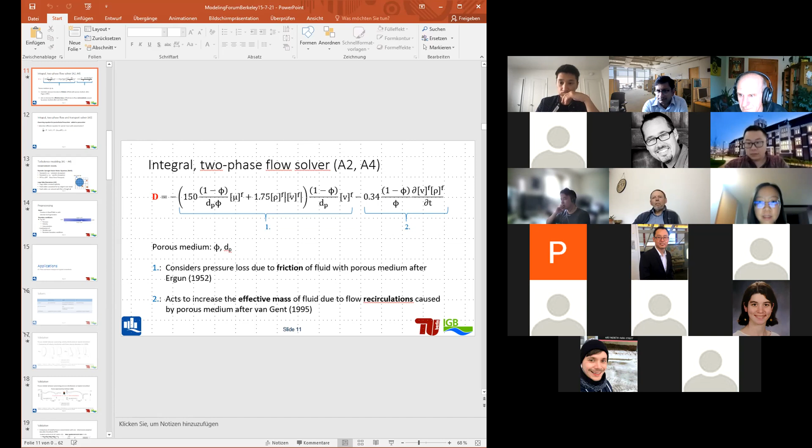That's a great talk. I'm wondering, because in the results you show the surface water simulation and you use two-phase flow, which means, in my opinion, the surface water can fluctuate. But in one of the conceptual figures in your methodology, you use an upper wall condition, which means the surface water is constrained within the wall. So I'm wondering if you have done any comparison between these different upper boundary conditions, and if this difference affects the simulation of hyporheic exchange.

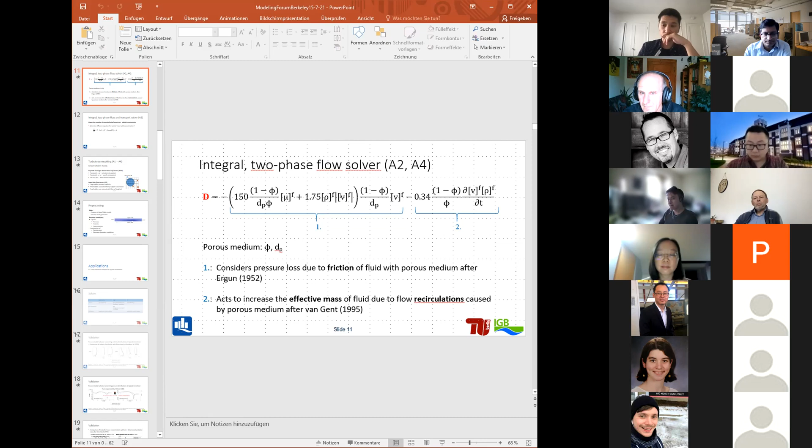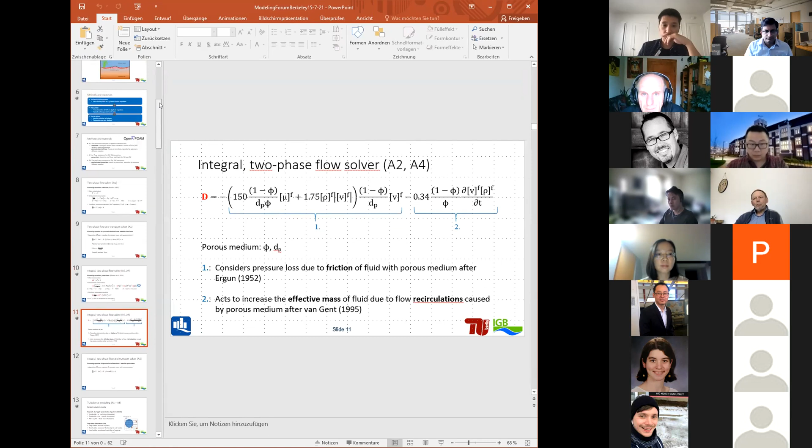Yeah, let me go to the slide again. So the upper wall - I have to mention that we did single phase and two phase flow simulations. What we see here is a figure of a single phase flow where there was an upper wall. In the other cases, we also have an upper boundary, but the system is 50% filled with air and 50% filled with water. And the lower boundary, where we just had water flow, of course, it is closed here.

And in the cases where we added the sediment, we could also close the boundary. Then we had neutral conditions, or we could give an inflow or an outflow describing gaining or losing conditions - what you also investigated intensively in your PhD.

Okay, so would you say that makes a difference to use single phase and two phase flow? At the beginning, before we did two phase flow simulations, we also made single phase simulations to compare numerical results with other results for different turbulence models and so on. I have not shown that here, but I have these slides also.

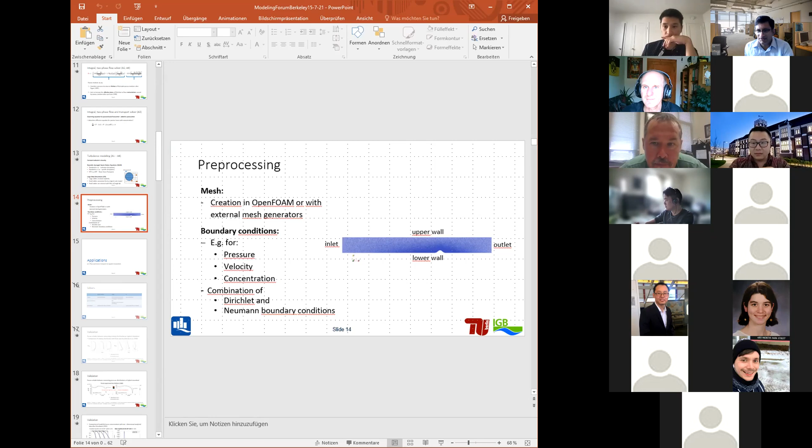And do you have any? No, I was just going to say, very great talk, we really appreciate it, learned a lot. Thank you, yeah thanks, it was a pleasure if it has been interesting for you. So I can imagine, yeah, what I heard from Ilan, from your daily life, you are investigating much larger systems.

Yeah, what of course is also very interesting is to consider surface water, groundwater interactions on the catchment scale. Of course, very interesting, thank you. Good night, Dr. Hinkelmann, I know it is late there in Germany. Yeah, it starts to get a bit dark, but yeah. Please enjoy your afternoon and your lunch soon. Sure, thank you, bye.